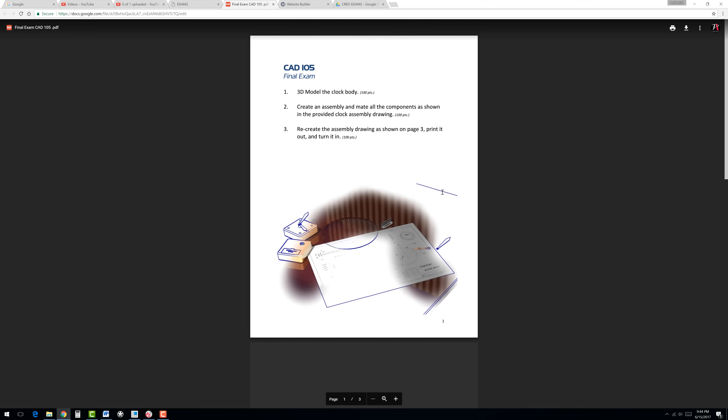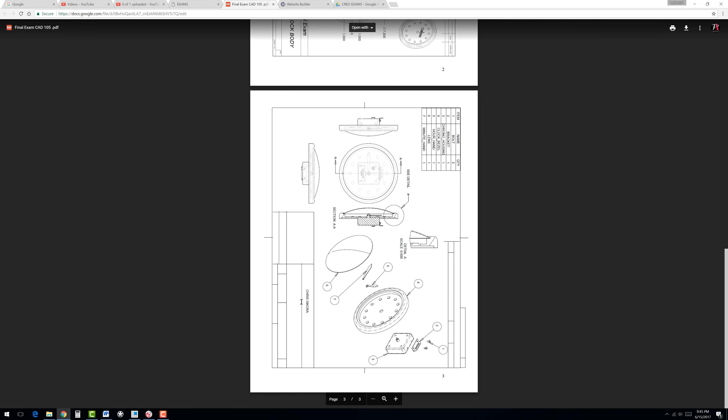Under part files, you should find the actual final exam parts. Go ahead and grab those and continue on. Once you get those loaded on your system, I'm going to start off with a new part file and build the clock body first using the dimensions given.

I'm going to go ahead and name this the clock body, so make sure you put a little underscore there, part solid. Hit OK, and select the front plane and go to extrude.

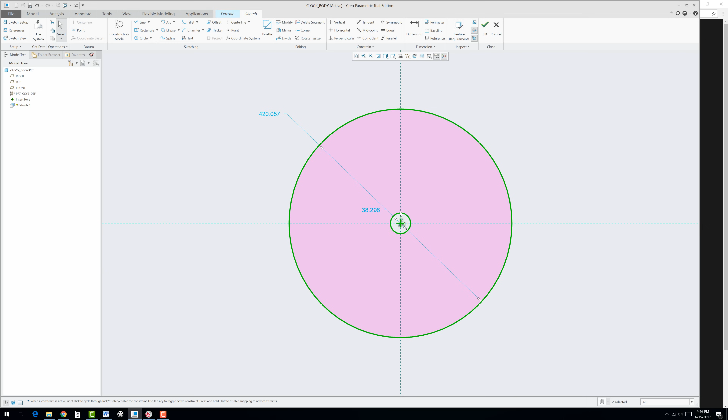Draw the outside diameter, which is 8 inches, and the inside diameter, which is going to be 0.5. Go ahead and change the smaller diameter first, and then the larger diameter to 8 inches. So 0.5 and 8 inches.

Now we could just hit OK, and the thickness of this is going to be, if you set it in the upper left corner, 0.75 thick.

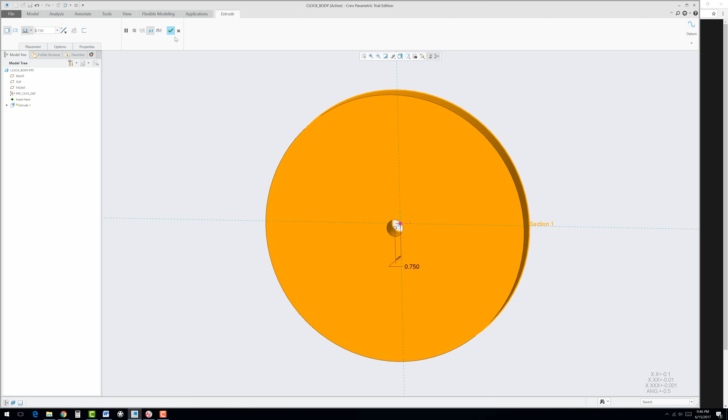The number one missed item on here when people take the exam is to put the fillet in. So the round, I should say. With the round, it's just a 0.25 radius. Put that in right away so you don't forget that.

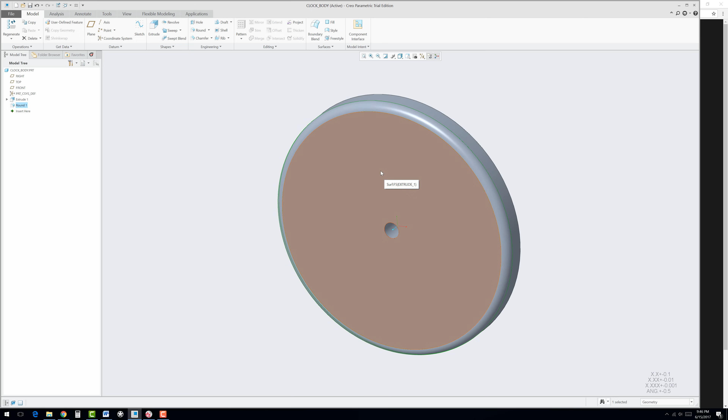Now we're going to put in the recess for the actual lens. Select this face, go to extrude, and draw a circle at the center. That circle needs to be 7 inches.

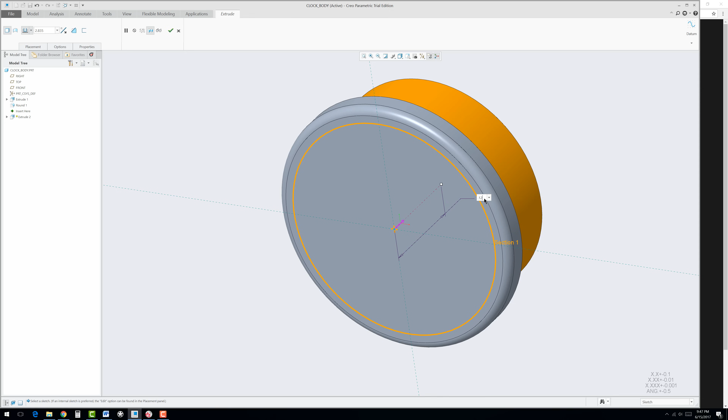Hit OK. And the depth here is going to be 0.125. Make sure you select Remove Material, and hit the green check.

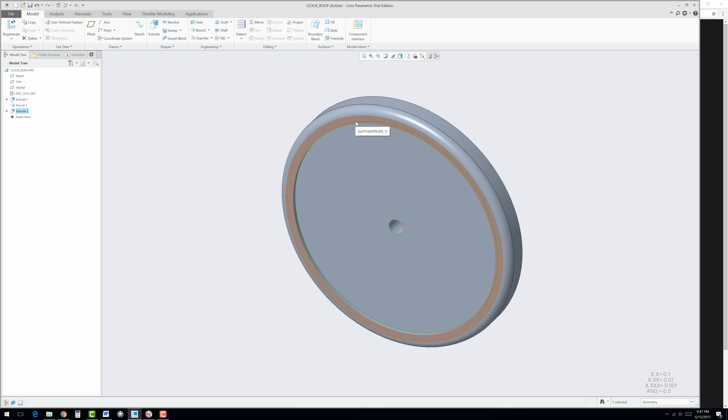Now you could either select the floor of that recess or select this face so you don't have to do any math, because when you look at the actual drawing you'll notice it's ordinate dimensions, so you have to subtract away 0.125 from 0.5, so it's 0.375. But regardless, if you don't want to run into that issue, which I see a lot of students do, they forget to do the math, select this face right here on the ring and go to extrude, and then you could just type in the explicit value for the depth right off of the print versus making the possibility of making a mistake.

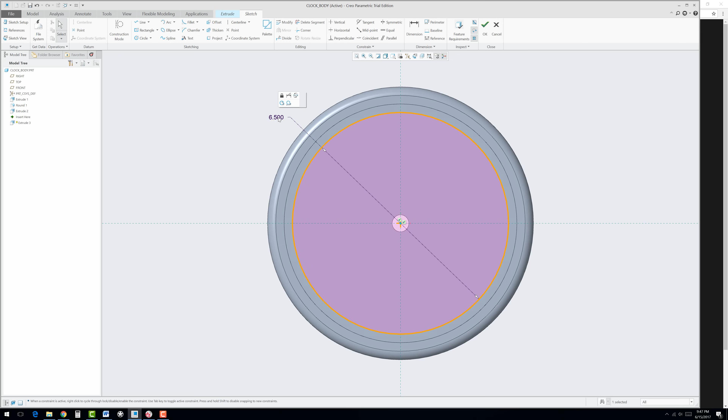So this now scales down to 6.5, hit OK and flip it. Again, you have to select Remove Material, and the depth of this one is 0.5. It will be 0.5 as long as you selected that face. If it's going too deep, change it to 0.375, and that should correct the issue.

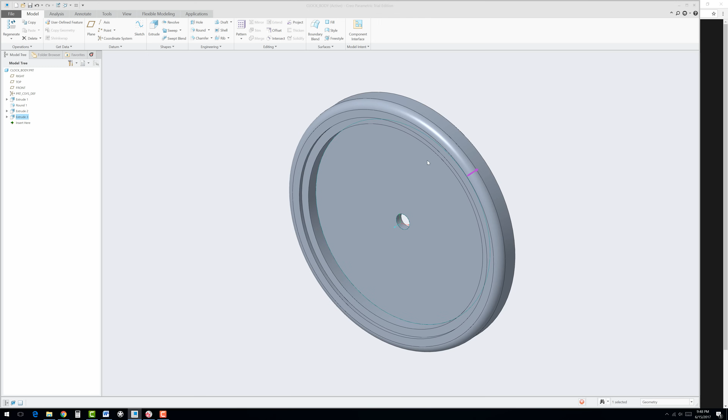Now we can select the floor of that hole and go to Extrude, and we're going to put the digits in. The first digit, we'll just draw a circle up at the 12 o'clock, and it's 0.375 diameter.

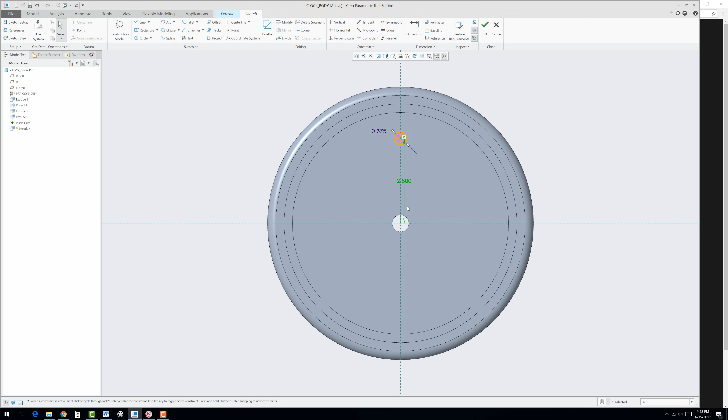Oops, I accidentally turned off my number lock. There we go. And it's located 2.5 from center. You'll notice on the print it actually shows a bolt circle, which is 5 inches diameter. That's actually 2.5 radius then. Hit OK, and the height of this is only 0.1, and enter.

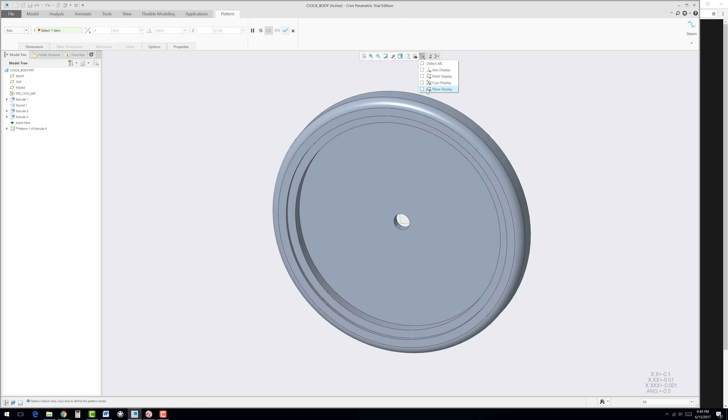Now we could go ahead and pattern that. Select Pattern, and up in the upper left, select Axis, and make sure you turn on your axis display. Now you have an axis in the center that you could select.

And now there's 12 digits, and 360 degrees divided by 12 gives us 30 degrees. Hit the green check mark, and now you can turn off the axis display if you like.

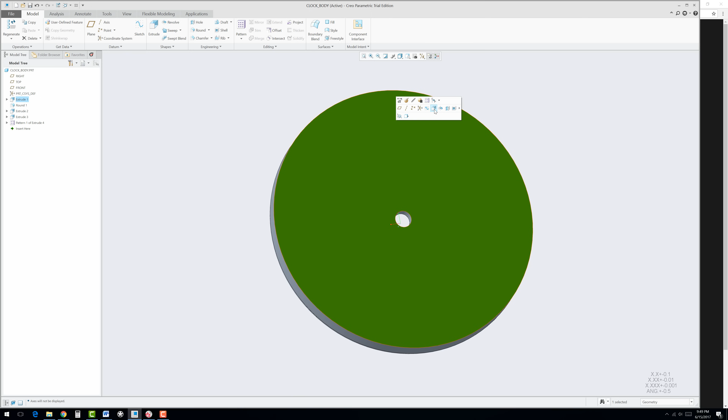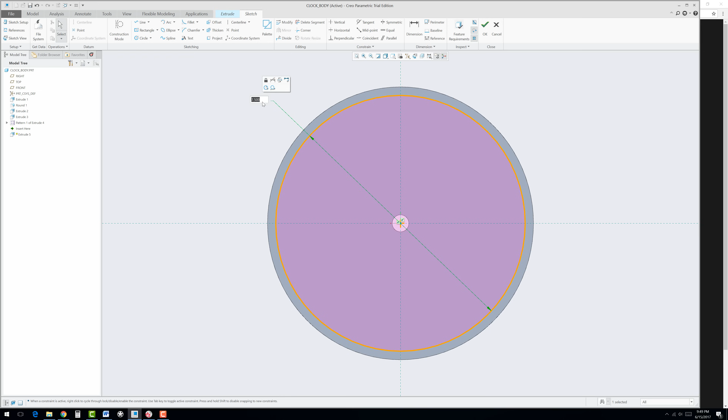All right, now the back side, there's a recess that we have to build. So select the back side, start a sketch, and draw a circle in the center. Unfortunately, I captured an equal constraint, and I didn't want that, so I'm just going to select that and hit delete. I don't want that to be equal. It actually needs to be, in this case, 7.5, which turned out just right anyhow, so we're in good shape with that.

Okay, so from there we're going to go to OK, and the recess is just 0.125 deep. Make sure you select Remove Material and hit Apply.

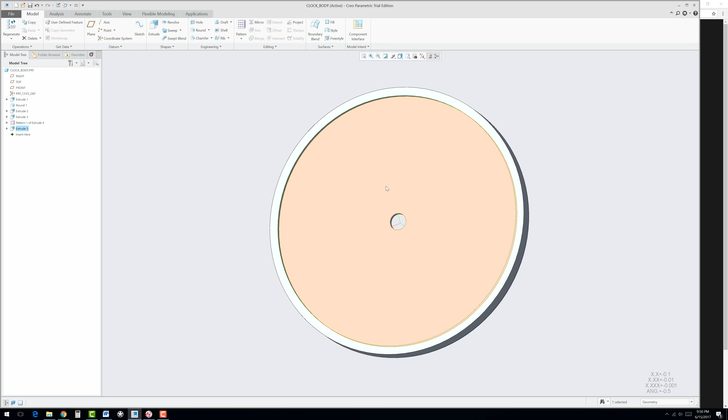Now you can select this face and go to Extrude, and we're going to put 4 prongs on here. But first, let's draw a vertical and horizontal center line.

That's so we can mirror this across, because we're going to draw one circle right there, and that diameter is 0.25, and then these dimensions are based 1 inch off of both center lines. So we'll just drag those out so you can see those. 0.25 diameter. Now we're going to mirror it across.

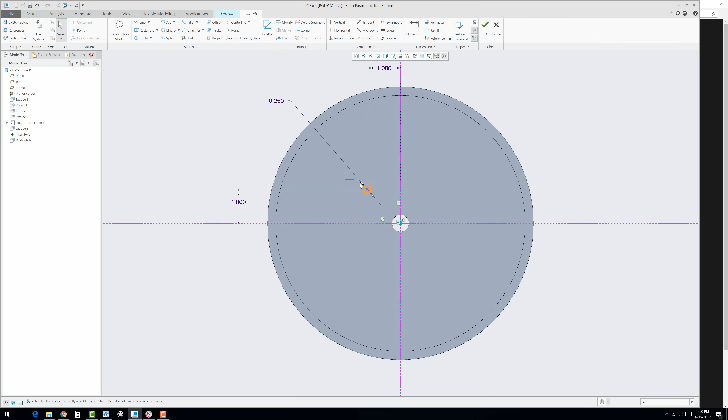You can only do one at a time, so select the geometry that you want to mirror, click on the mirror icon, and select the center line you wish to mirror it across. Now we could get 2 across here, so just group select those, or control select them, go to mirror, and then select the center line, and it should go onto the other side.

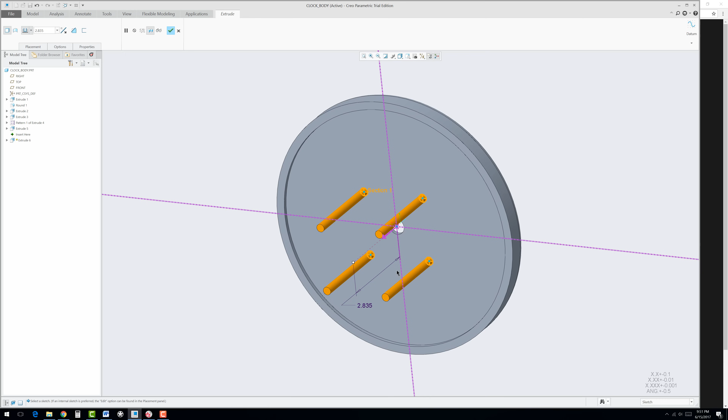Go to Extrude, and the depth is going to be 0.25. Hit Apply, and you've completed your clock body, worth, I believe, 100 points out of 300.

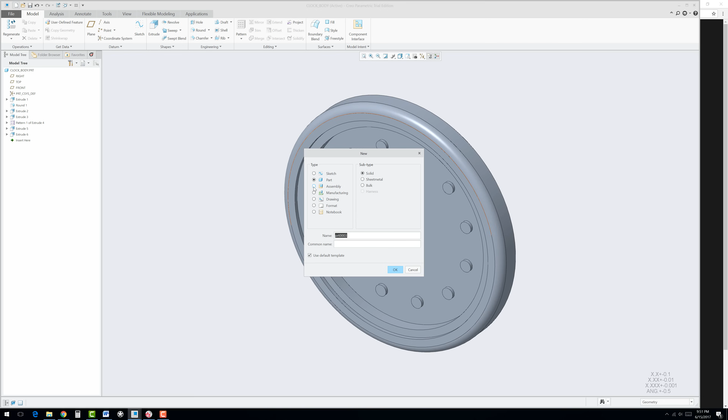Okay, now we're going to go ahead and move on to assembling the clock. So let's go to New, Assembly, and we'll just call it the clock.

Okay, the first thing we could do is drop in our clock body. So click on Assemble and go to In Session, and you should find the clock body. Hit Open, and we want this to go to the default.

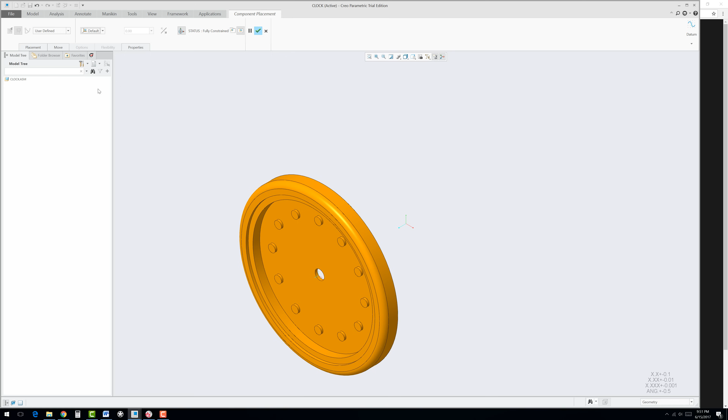And if you don't put the default in, remember, you might have a difficult time getting the cross-section view because it utilizes the assembly plane, the right plane in the assembly, right there, to do the cross-section. Otherwise, if you're a more advanced user, you know the other techniques, don't worry about it. But if you are not an advanced user, because this is the basics class, assuming so, that might be a challenge for you.

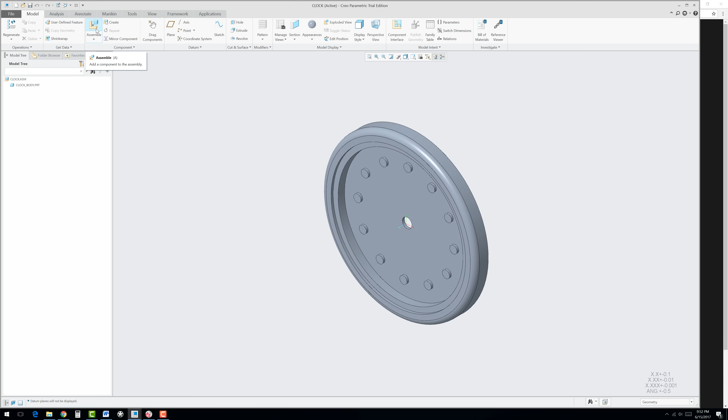Okay, so now we're going to go ahead and drop in the chrono housing. So I'm going to go to Assemble, and I put on my desktop here the final parts, and I actually have them as granite files. If you are on a commercial license, you could use the granite files. Otherwise, if you're on an educational license, I actually have the part files for you. Okay, so with that being said, there's the chrono housing.

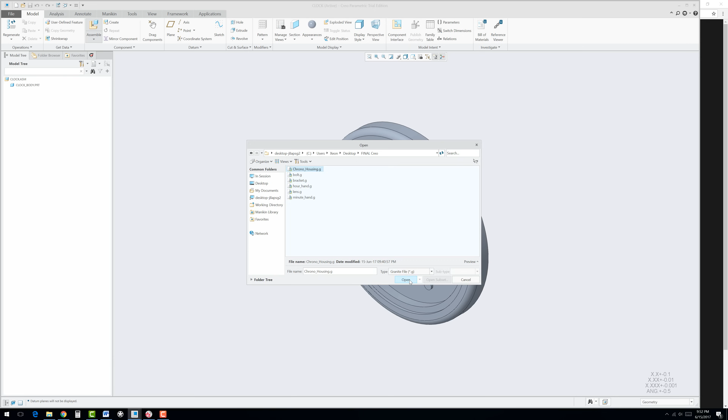I'm going to hit Open, and I'm going to get it close in proximity using the arrows to pull it, and then this little green band just to get it rotated so it looks like it's pointing towards the hole.

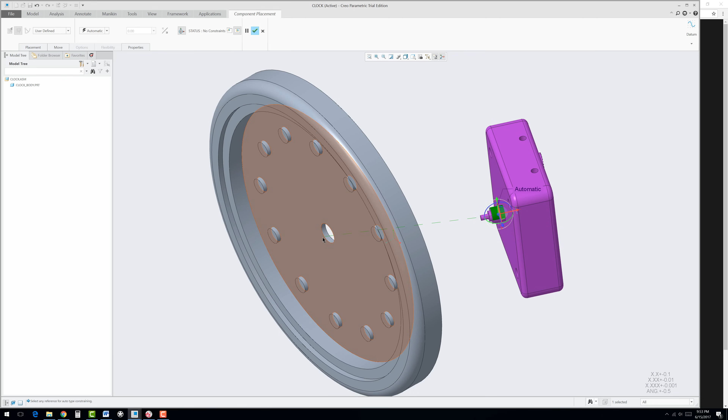Now I could select this sleeve here, and then you could actually select either the hole, which might be more of a challenge, or the outside body. Either way, it's going to be aligned to the center line in the middle of both of those entities. And now you could go ahead and align this face of that hole to the hole in the upper right.

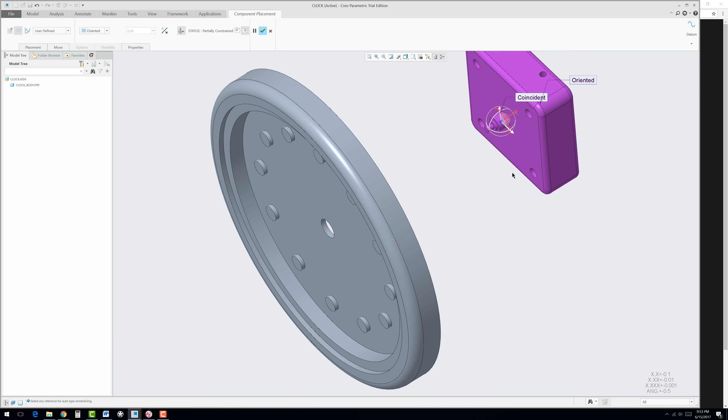And finally, let's go up here to Placement and add a new constraint. Sometimes this one's a little more difficult, so sometimes you have to go up to that little placement option and select this face, and instead of setting it a distance, change it to coincident, and it should lock into position.

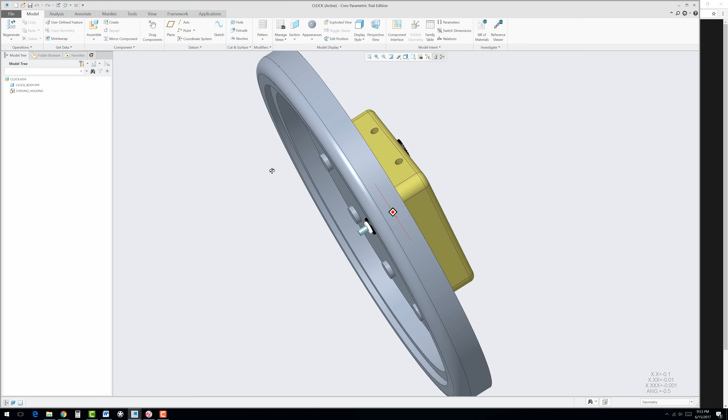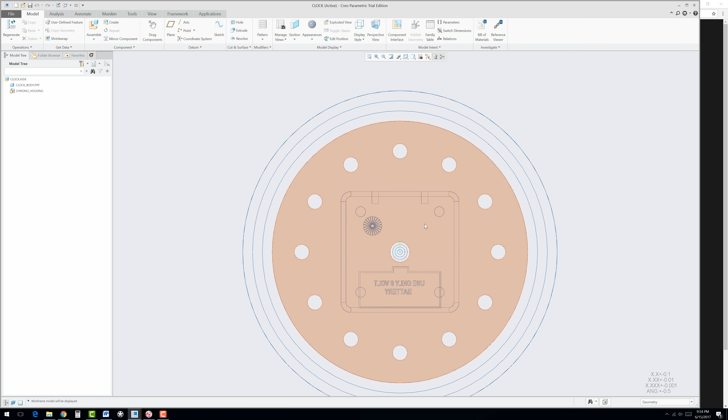And now we have the chrono housing in position. The next item of business is we're going to go ahead and just verify this. So I'm going to go to the front view orientation and just verify that it's aligned. You could go to wireframe, and as long as the holes look aligned, we're in good shape.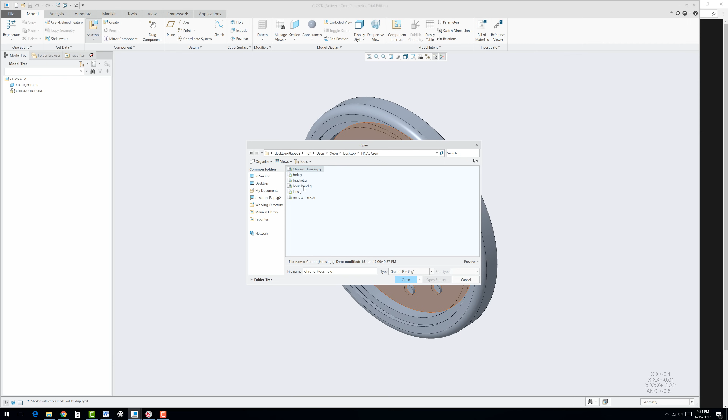Okay, now we're going to start adding the minute and hour hands. So again, go to Assemble. Let me go back to Granite file here. I'm going to look for the hour hand first. Again, it's a good technique to get this close in proximity, just so you can see what you're selecting.

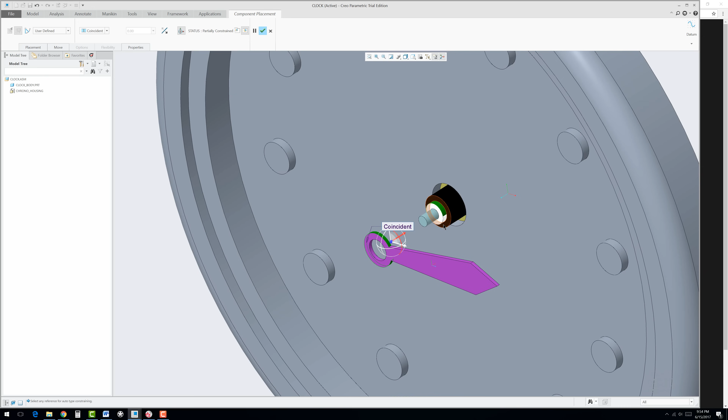All right, I'm going to go ahead and select the outer ring here to this white sleeve. Okay, and now the black end of the sleeve here, select that, to the back side face of that. If you have to, you could grab the arrows to drag it out and hit apply.

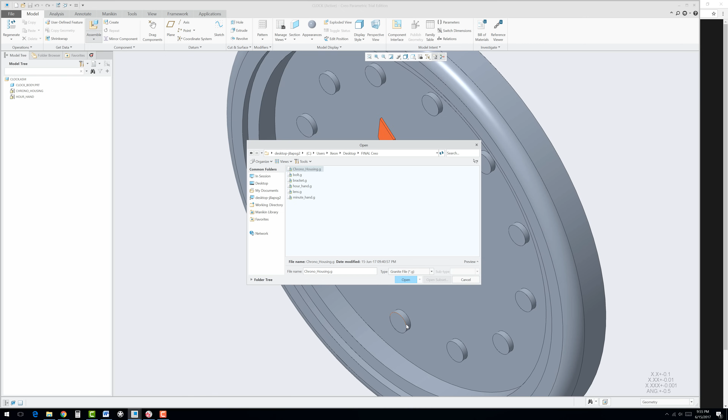Go to assemble. Let's bring in the minute hand. And there it is. Open that up. Again, get it close in proximity. You could even rotate it a little bit if you wanted, using the ring.

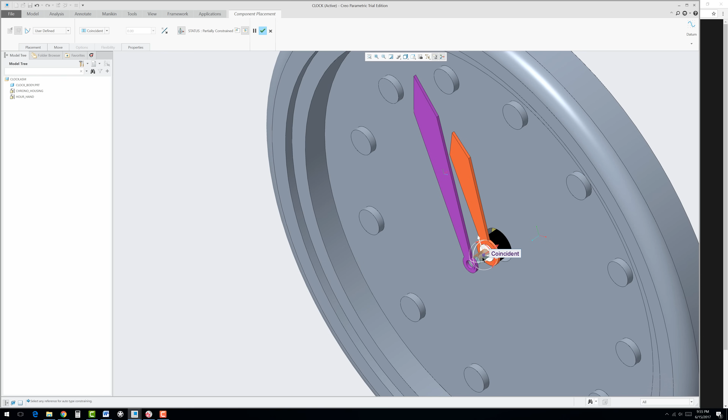Okay, and then this one, we'll select this face to the gray surface of that to go coincident. I'm going to drag it out a little bit because I think it's going to be difficult to select the end face. So this face here needs to go coincident to the white end of the sleeve and hit the green check. It really doesn't matter what time it locks into, that's fine.

Okay, so at this point now we could bring in the lens. Again, I just like doing this where I get it somewhat into its orientation state ahead of time.

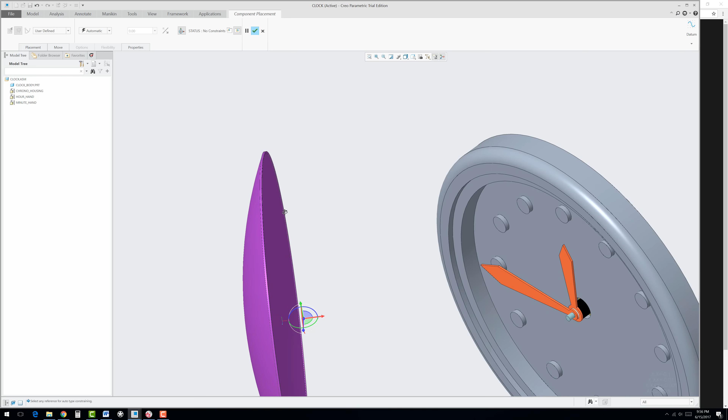Now this one we're going to go ahead and select this face here for the ring, and then we could select this outer ring or inner, whichever one you want. Then finally this flat face is going to rest on the recess that we created right here.

Be careful, I have a lot of students, this is probably the number 2 or number 3 most missed item. They select this face, then the lens is just hovering over the surface. You don't want that. You want this secondary ledge to lock into.

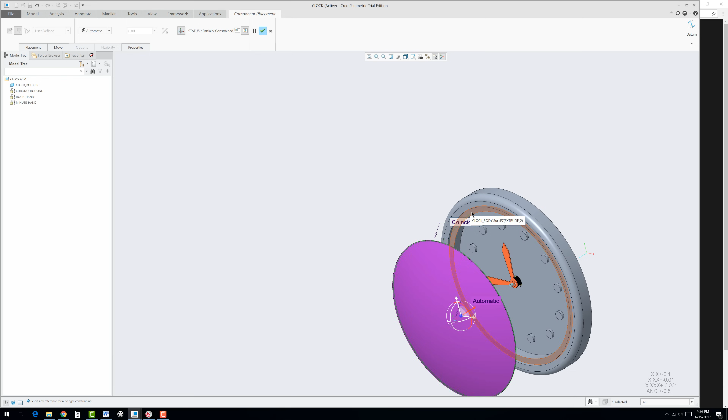Hit apply. And now we're going to go ahead and bring in the sheet metal bracket on the back there. So assemble. And select the bracket. Open that up.

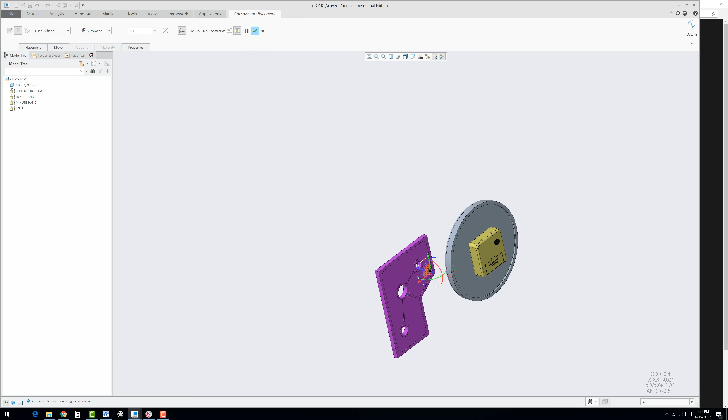Oh, and unfortunately, this is a problem because I had an earlier bracket part similarly named, and it brought in what was in the memory buffer. And so that unfortunately is not the right bracket. So let me delete that.

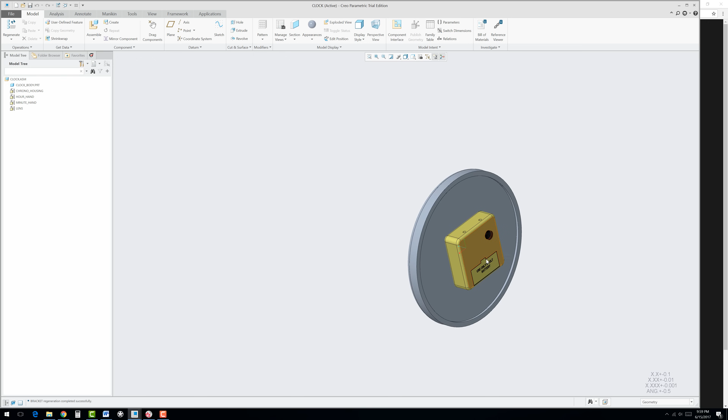Okay, so I've ended up getting rid of that part. I just middle clicked a couple times, selected it and hit delete. Now I'm going to bring it in. I renamed the part bracket 2, so I shouldn't have that issue. So I could go over here to open, and there's my bracket 2. Now there's not a conflict between parts that are in the buffer.

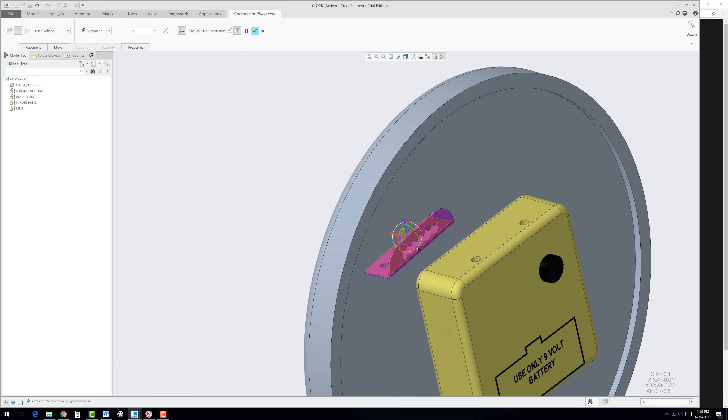Okay, again, get this close in proximity, and we could rotate this down and then take the blue ring, rotate this way because this is the wall mounting bracket. And we could go ahead and select the underside flat face and mate that to the top face here. Let's get that over there.

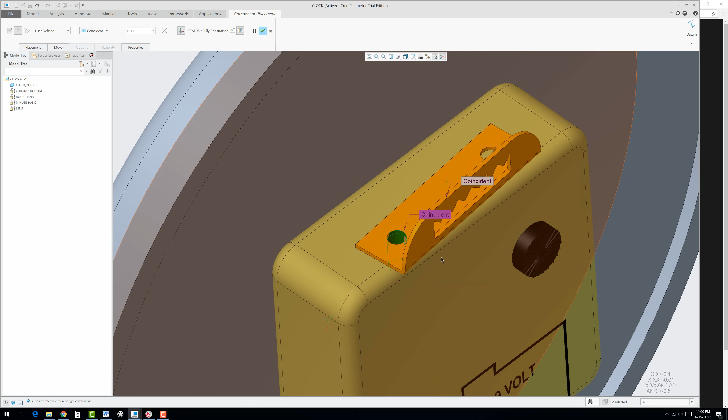And now we'll go ahead and select this hole to this hole, and this one to this one. Unfortunately what happens here sometimes when you're doing a duplicate coincident relation, this is where you have to go to new constraint and then add the next one again. There we go. And hit apply.

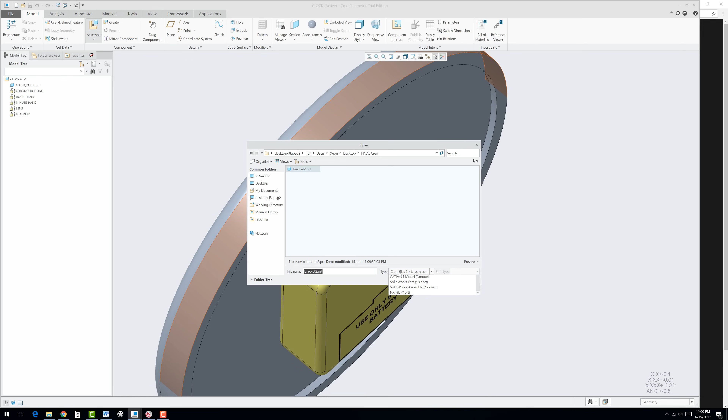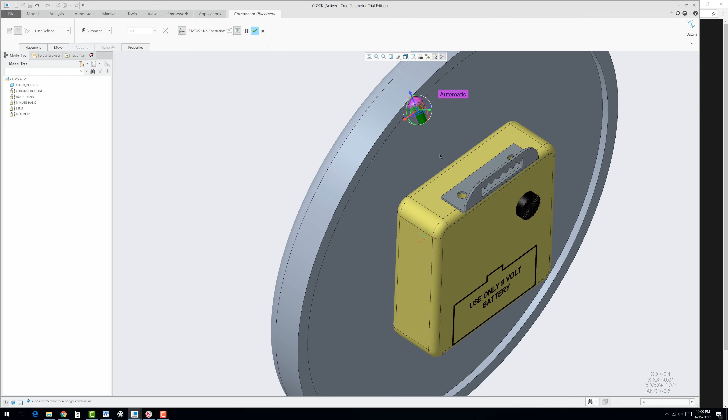We'll rotate it a little bit. Okay, and here I'm going to go ahead and select this face to this face, and it's way up there. That's okay. Now get the underside of the cap to the top surface of the bracket. Make sure it goes coincident. If it doesn't go coincident, make sure you select it right here. Okay, and hit apply, and one more bolt.

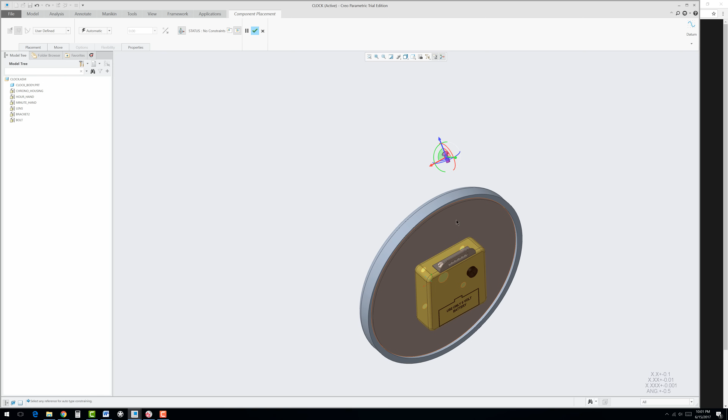And the same thing, the cylindrical face to the open hole, and then the underside of the cap to the top surface of the bracket.

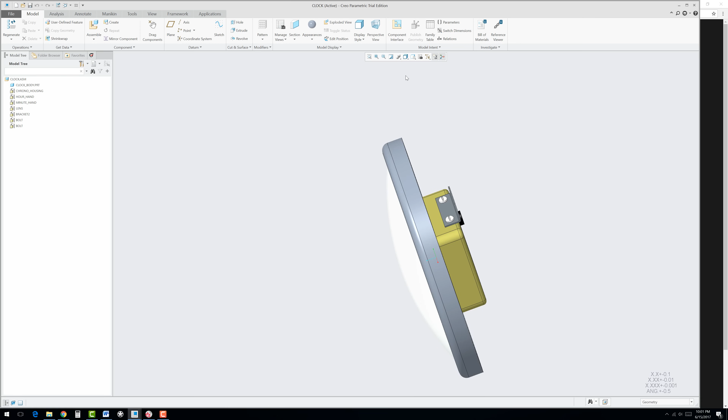Okay, and there we are. So now we're going to explode this. Let's go to our standard orientation, which should give us isometric, because we want that isometric view for our drawing. Now we have to make an exploded view, so I'm going to hit edit position, and it explodes it automatically to some extent. We're going to use it because it's pretty close to what we want. So I'm going to click on this lens and drag it forward a little bit and spread some of these parts out a little bit better than they were.

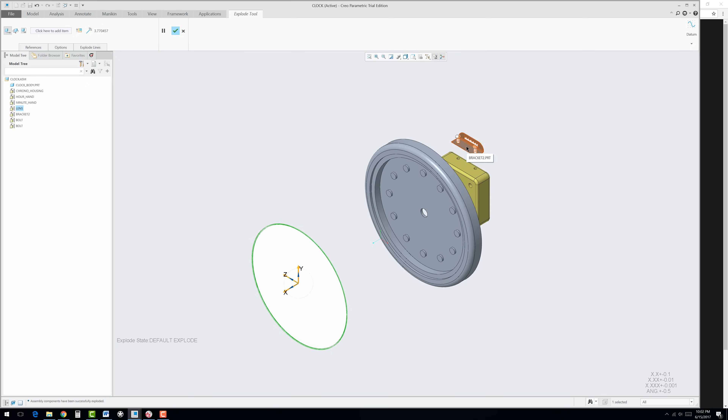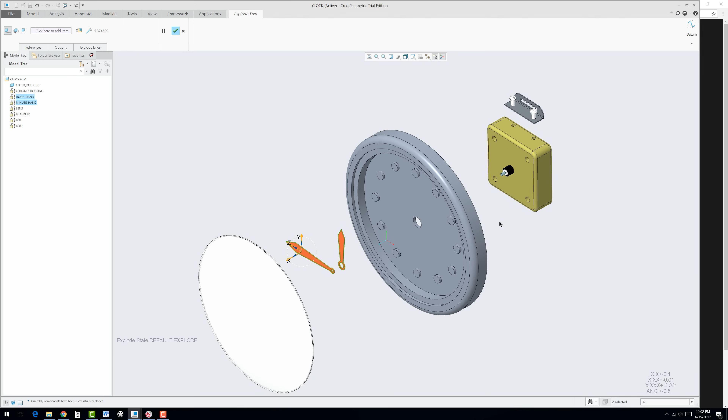And then here we could control select multiple items to spread out. Get those out there. And the minute and hour hands are over here, so select those, hold control for the second item, second, third, fourth, drag those forward. And then finally, let's bring those bolts up just a little bit higher. There we go.

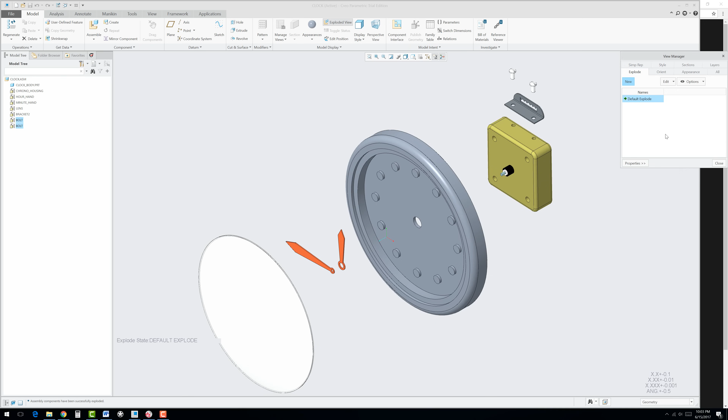And apply. Now you can actually do centerline sketches and things, I'm not going to do that right now. But now we have to take a picture of it, so we go to View Manager with the little camera there, and go to make sure it's set to explode, edit, save, and save over your default explode. And then close. Alright, we can turn off explode now.

Now we're going to go ahead and bring that into a drawing for the last part of this exam. So go to New, Drawing, and you can just call it Clock. Use Empty with Format, Browse, and select a format and hit OK or Open.

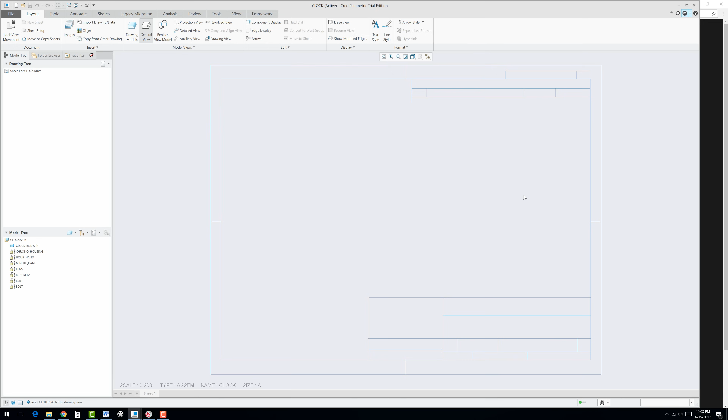Okay, we could just click on General View, hit OK. Let's drop in our isometric, and we could even explode it. We could go to View State and Explode. There's our exploded view. We could enlarge it a little bit if we want, but let's see if we have enough space on the sheet.

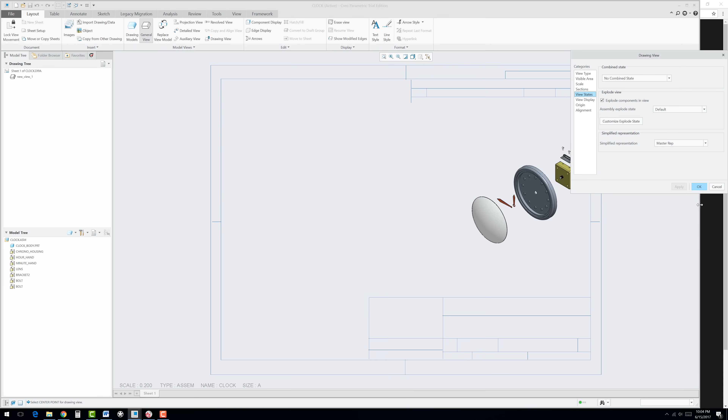Actually, I think I will enlarge it just a little bit. So if I go over, I can actually change it down there. I'm going to hit OK. Let's see if we change everything by double-clicking right here. We can now set it to, let's change 0.3. There we go. Now if you have a difficult time moving it, remember turn off lock view if you can't move it.

And now let's go ahead and bring in some additional views. Right click or go to general view, either one, click, hit OK, left click, and bring in the front, double click, and let's see, we'll hit OK.

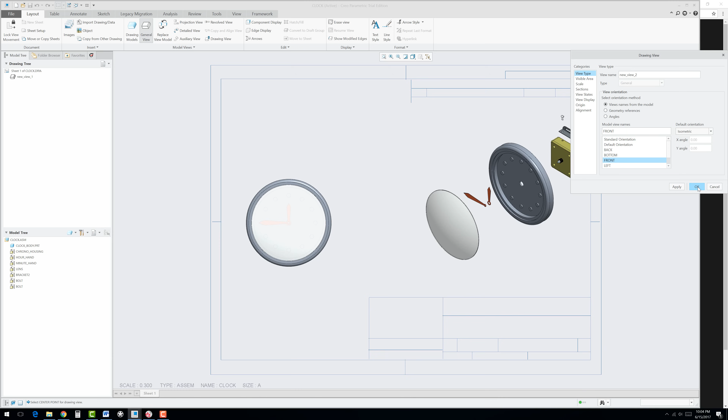We'll change all the views together once we get these in. So now we could go to project one down as well, click on this, project a bottom view, and now a right side section view, but we'll project.

And now to transform that to a section view, just double click on the view and go to sections, 2D cross section, add, bypass this just by hitting done. Type in the label, which is capital A, hit the green check, and now we have to bring up our planes. So turn on plane display, and we got to select off of this front view the center one. There it is. Okay, and once you select it, if you get a green check mark, you got it.

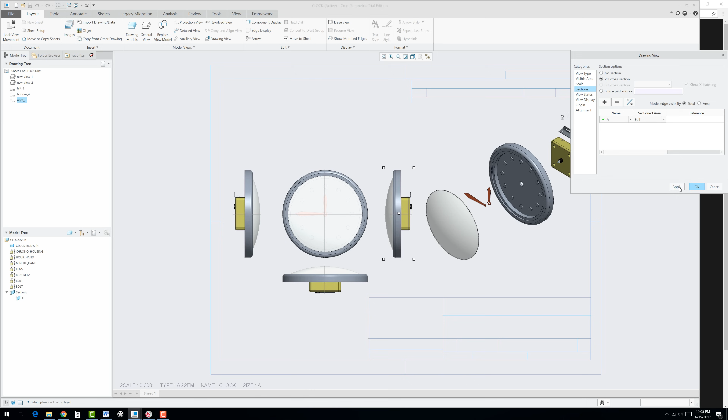It's a little tricky now with this latest release to get that, it seems as though. But go ahead and hit apply, and now we can see our section, but you're not done yet. Go to view display and make sure you turn on no hidden and leave tangent edges as a default and hit OK. Now you could turn off the datum plane, and now we have our section view.

Let's get this positioned a little bit more center. And now we can make a detail view.

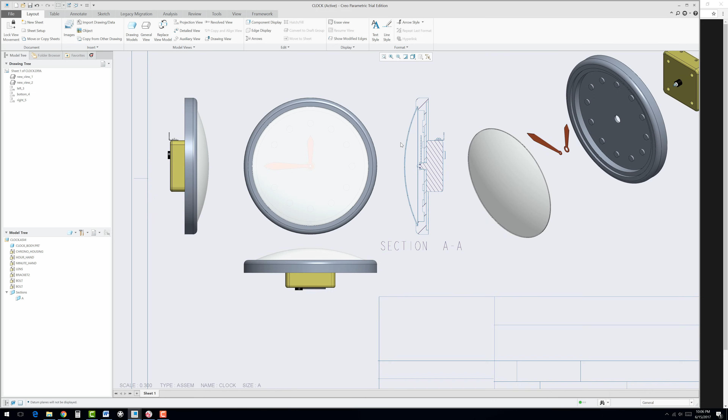So go to Detail, click right in that little area there, get the little X, start at the 12 o'clock for a circle, 9 o'clock, 6 o'clock, 3 o'clock, middle click, and then left click up here to drop that detail view in position. Move that over here. Okay.

All right, now at this point we're going to bring up the bill of materials. Unfortunately, I don't have my template for it, so we'll make it manually here. Note that the template is so much easier if it's on the drive - I hope to put it up there. Very easy to insert, it's all automated, so just be aware of that.

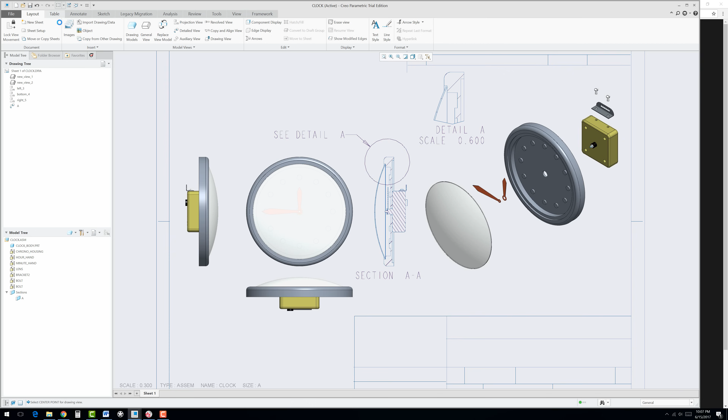First of all, we'll go over here to Table. Zoom out a little bit. Instead of Table from File, we'll just go to Table, and let's see, we have 1, 2, 3, 4, 5, 6, 7 parts. So we're going to need 7 down, 1 through 7 plus the label, that's 8, and then 3 to the right. Go ahead and click and just drop that right up here.

Now you'll see it's very large, too large. So while it's still all in a selected state, right click and let's go to height and width. First of all, the width - let's turn on automatic height adjustment, and the height we'll change to 0.2.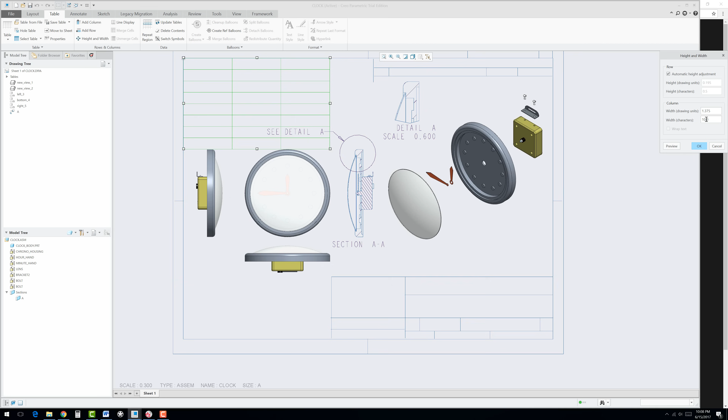Let's see, column width - actually, let's go with automatic height adjustment there. The width in characters, 10 is okay right now, but I guess we do have to change the height. So let's change it to 0.125. Let's see what we get. Preview it - there we go, that's much smaller, almost too small. Let's go with 0.25, and probably 0.2, which I think is perfect.

Hit OK, and now the first cell here, we could go ahead and select that, right click, and width - we only need that to be around 4. Hit OK, and then this next one over here, select that, right click, and width - this one should probably be around, since this is the quantity, maybe 4 as well. That looks pretty good.

So now what we're going to do is just double click in here and put in item number. We'll just put item there for right now. You'll see that the text, unfortunately, is very large. So let's select this, and I think we could select the whole thing and change the text style. Go to text style, and the height for this we'll make 0.1 and apply. That fits much better. So that's the item number.